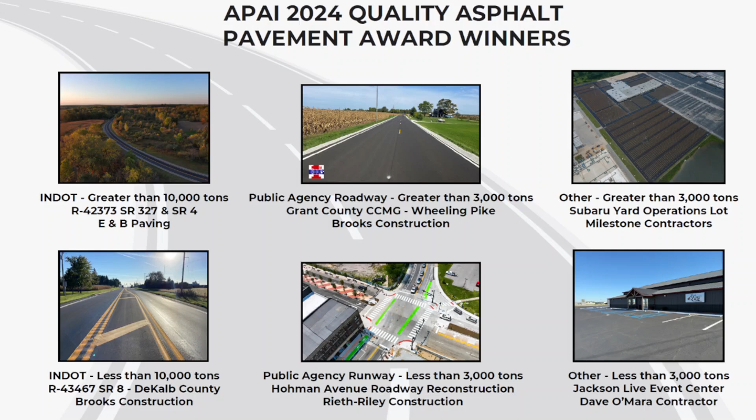I know Calvin touched on the legislative efforts of what our associations do, but it's a big important part that's often not talked about when we come to technical meetings like this, but it's what really creates the opportunity for us to build roads all around the state. That's the legislative outreach that BIC leads to make sure that we have designated road funding mechanisms. We were all involved with the gas tax increase that took place around the 2016 timeframe, and as we've seen inflation and other factors that have continued to cut into some of the highway funding, BIC right now is leading an initiative to try to identify other methods to fund our roads in the future.

So we're excited to see House Bill 1461 get out of the House. It opens up some options for the state to use to search for that funding and to make sure that we have that going forward. That's in the Senate now for consideration. But we just always want to make sure that you guys, as you're having conversations with legislators or interacting even with friends and family, make sure they understand the importance of that designated highway funding and what that means to each of us in our jobs.

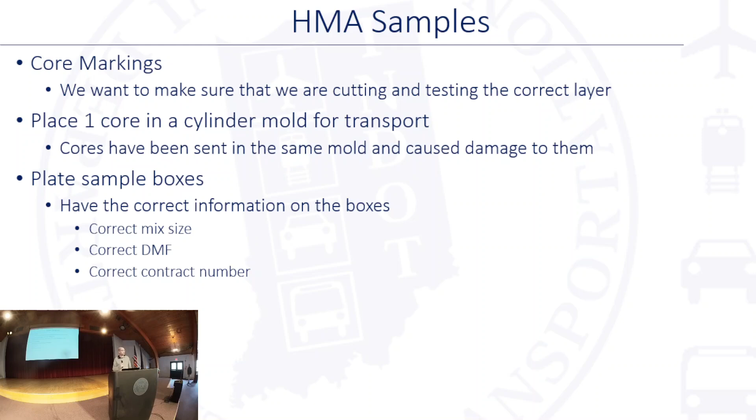And that's my short little presentation on things. So I'm going to turn this over to Nathan, and he's going to get you taken care of. I think that was the best presentation so far.

All right, so we're a little behind, and I am wired right now on caffeine. So we're going to talk fast. Okay.

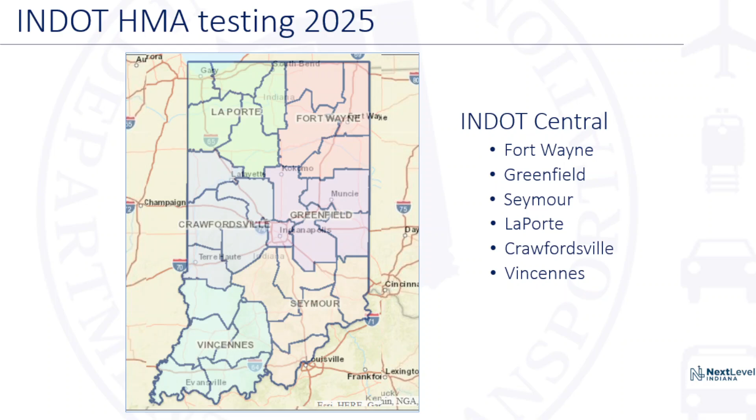Let's see, like Seth said, I think everybody knows all the samples are coming to Indianapolis this season, same as last year. And then another housekeeping note, the HMA sample exchange, for those who want to participate, I was told that email went out this morning, so look for that.

And then again, just as mentioned in the other presentations, just a reminder that we have the M&T website. We try to keep a lot of the pertinent information on there: qualified product list, test methods, some more pertinent HMA ones, the 2025 GSB list, which this is actually outdated now because there's another one posted, the PG binder index, things like that.

As far as the rest of the presentation, I really just want to, kind of like normal, go over some of the spec ITM updates, and then audits and DMF entry and Paywizard discussion. And then we'll probably skip over the research projects for the sake of time.

Okay, so if you're not used to it by now, well, everybody should be with HMA at least. We have RSPs posted on the website for all the spec changes. And so I just wanted to go over a couple of main ones here. And the first one, like has been said, is the PG binder changes, switching to 58-28.

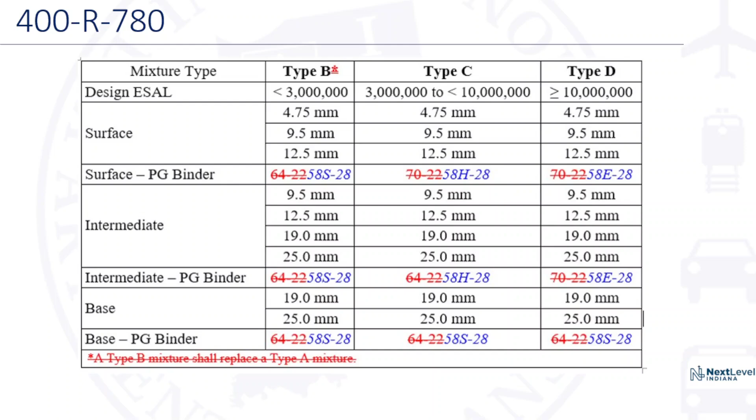And then related to the binder changes, for any contract that was let without those binder changes, so anything basically that was paving last year and is paving this year as well, if you need to add those binder changes into the contract, there is a construction memo out there on how to do that. You can still use the old binder grades, but we're assuming most everybody doesn't have the tank storage at their plants. So if you need that, there it is.

And then also for those who participate in the binder index and use that, just be aware that there's really no effect for you as the end user. We just started changing the data we were using to populate that.

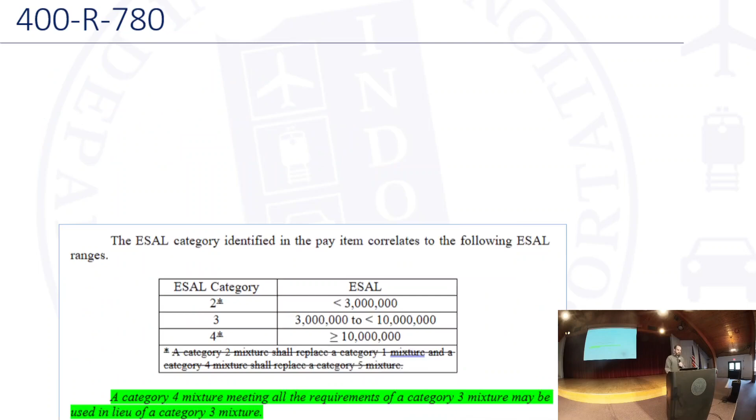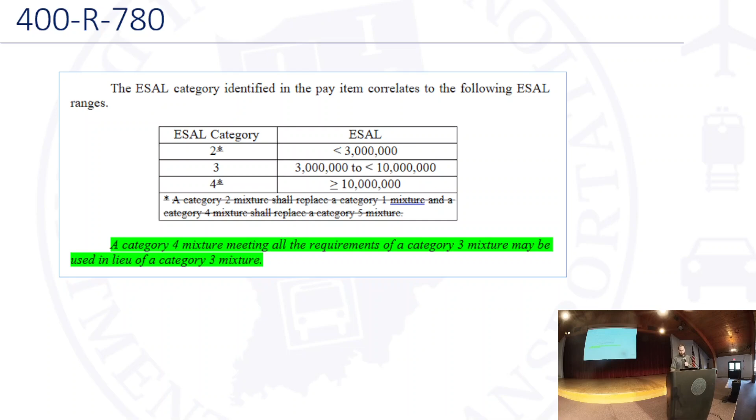I put this in the presentation because it's actually included in the binder RSP, but it's not necessarily binder related. We did make a few minor spec changes. The first one is just a reminder that we now allow category 4 mixtures to be used in lieu of a category 3, and that's for 401 mix.

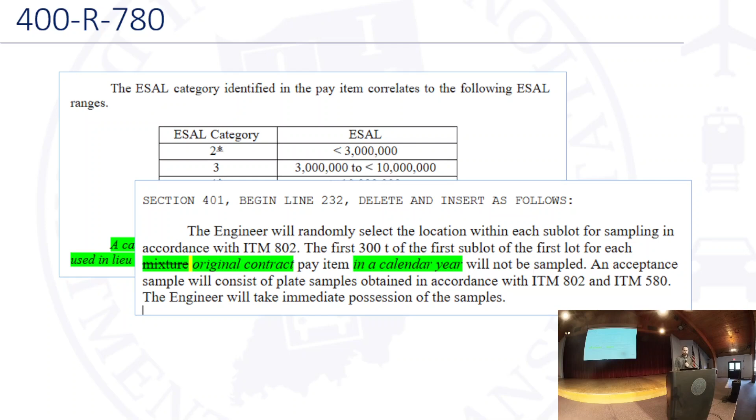Another clarification - we kind of were operating this way unofficially, but it did cause some confusion. So we wanted to spell it out clearly that for each contract line item, in a calendar year, we will allow for that 300-ton exemption on startup. So every year you get that 300-ton window per CLN.

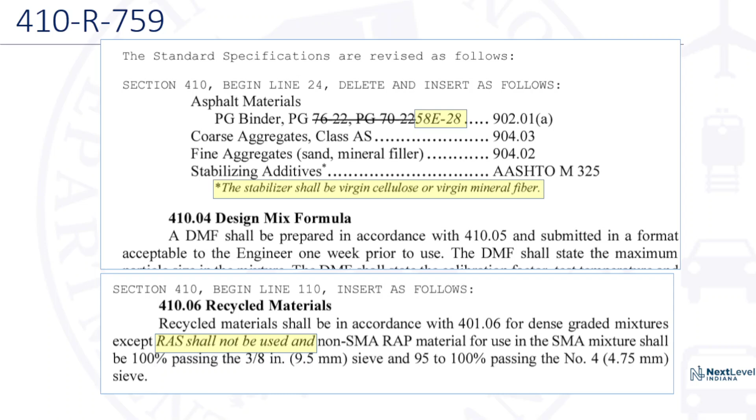We did state that virgin stabilizer materials shall be used, and we made a change disallowing the use of recycled shingles in SMA. The main intent of all these changes was that a stabilizer material is required to be added into the SMA, and I'll talk about that a little later as well.

This is the last RSP I wanted to point out. We have our void reducing asphalt membrane, VRAM. There's one for HMA and one for SMA. These are not changing for this year, so it'll be the same - targeting our higher roadways, typically interstate or our major 4-lane divided highways.

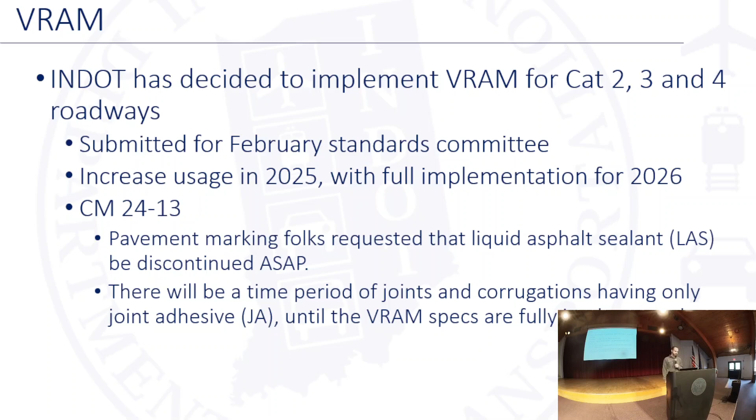The reason I'm talking about it right now is it just went to standards 12 days ago. We worked with the industry, and this won't take effect until construction next year, but VRAM will be used on all our category roadways - not just category 4, but also category 2 and 3.

The reason it's pertinent to talk about this right now is there is a construction memo, 2413, that came out very late last year. The whole reason this was sparked off is for years our pavement folks and pavement marking folks at INDOT have been talking at great lengths about whether the liquid asphalt sealant is affecting the pavement marking adhesion. Long story short, we came to an agreement to stop using liquid asphalt sealant immediately.

That started late last year. The construction memo does instruct to stop using liquid asphalt sealant this year. Essentially there'll be a year of a gap, and then next year contracts will start having VRAM on the joints. So just be aware of that.

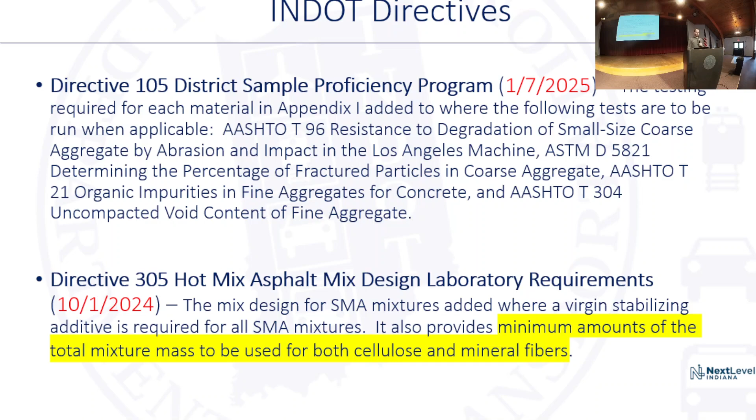Same thing with INDOT directives - I didn't have too many changes this year. Directive 105, I don't have direct oversight of this one, but I noticed it was changed, so I wanted to put it up here. If any of that makes sense to you or affects you, you might want to take a closer look. That just changed on January 7th, so I'm not really sure of the details on that one.

And then Directive 305, that one I do have control over. This goes back to what we were talking about with SMA - it basically is the mix design requirements. It also states in there that virgin stabilizer material shall be added to SMA. So that is in there now.

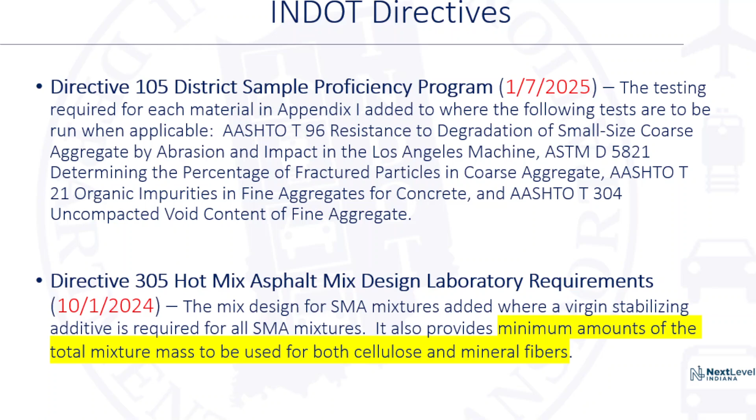All right, audits. This is audits for 2024.

Well, one of these does not look like the other. Obviously, with some of the personnel changes and stuff, I think Laporte has some catching up to do, but I'm sure he'll get on that. They're usually pretty solid with audits. But that's the total number of audits. We have 85 plants we audit yearly. 2024 looks like Crawfordsville won, so they got the most gigs. But we'll see who the winner is next time.

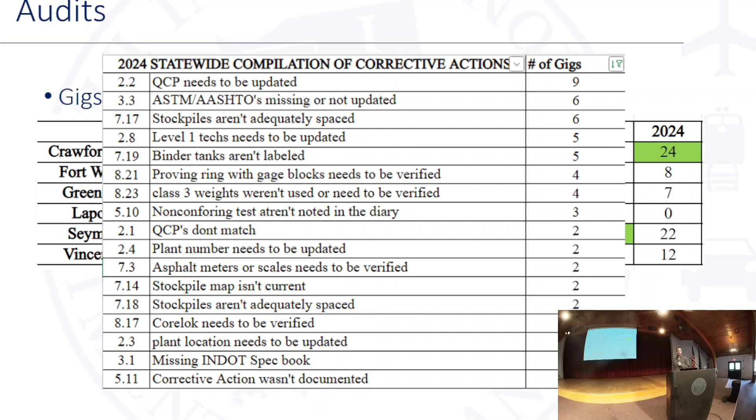But this is statewide, the common gigs that popped up. Just things to be aware of when the audit's coming to your plant. Not surprising, QCPs are outdated, or ASTM/AASHTO update.

Some we can control, you know, stockpiles adequately spaced. Maybe a level 1 tech lost their qualifications or became certified, and that stuff's outdated on the QCP. And then the last one I'll point out is binder tanks not labeled. That's one way to avoid the most basic confusion at the plant. Especially this year with the binder changes, that could be very important. So just be aware of those.

So quickly, DMF entry. We'll get into the cloud-based programs here for a few minutes. No major updates for DMF entry scheduled. Same as last year, accepts HMA, OG, SMA, so all that gets put in there.

The only thing I did want to point out is there is the option to select all the binder grades, so you might want to go ahead and select all the binder grades just in case any of those are needed in the future. If you have submitted a design already and it's been accepted and one of these binder grades is missing, go ahead and email me. I can actually add those after the fact. I don't think the district has the ability to do that, but I can add those if needed.